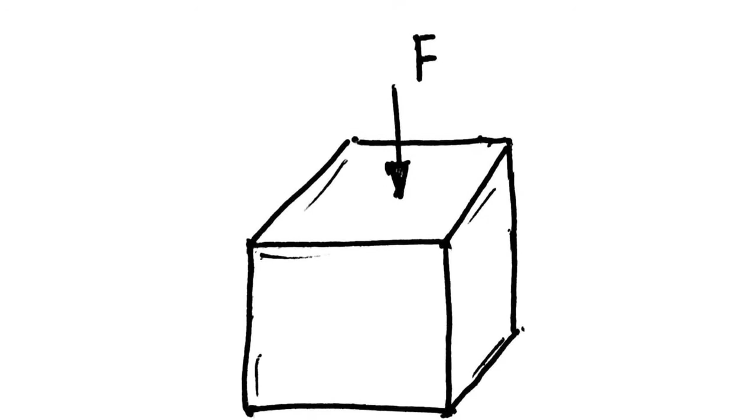Let's observe the picture below and answer the questions yourself.

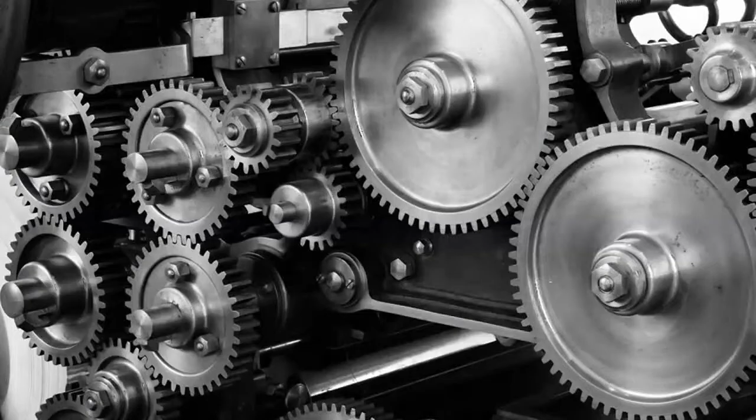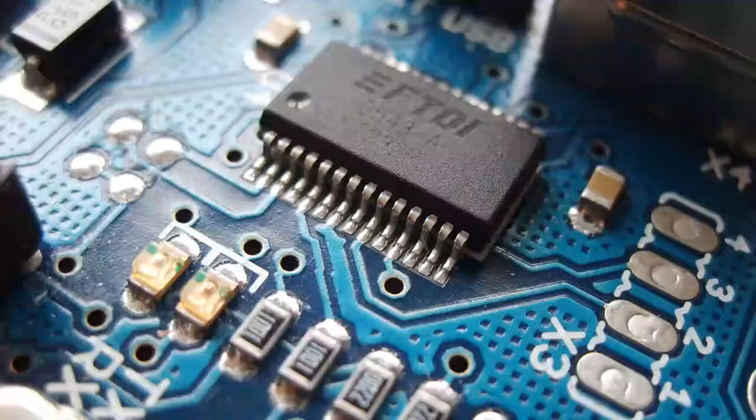In observation, everyday stress simply calls awareness to a situation that needs attention. It reminds us to slow down, steady ourselves, focus, and get ready. We tackle these everyday stressors by studying for exams, practicing a class presentation, or thinking about how to work it out with a friend. We experience stress in daily life.

Stress is a reaction to a changing, demanding environment. Properly considered, stress is really more about our capacity to handle change than it is about whether that change makes us feel good or bad. Change happens all the time, and stress is in large part what we feel when we are reacting to it.

We summarize in observation, stress is everywhere. Although stress is a natural part of life, when it's prolonged or extreme, it can lead to changes in physical and emotional health. Stress becomes a problem when we feel a lack of ability to control what is happening. Stress may trigger physical reactions, upsetting thoughts and emotions, or ineffective behaviors. Stress is a natural occurrence, physically, biologically, and chemically, a universal process.

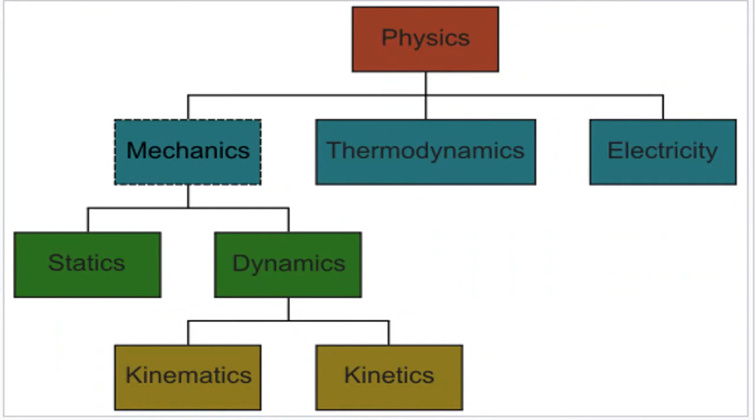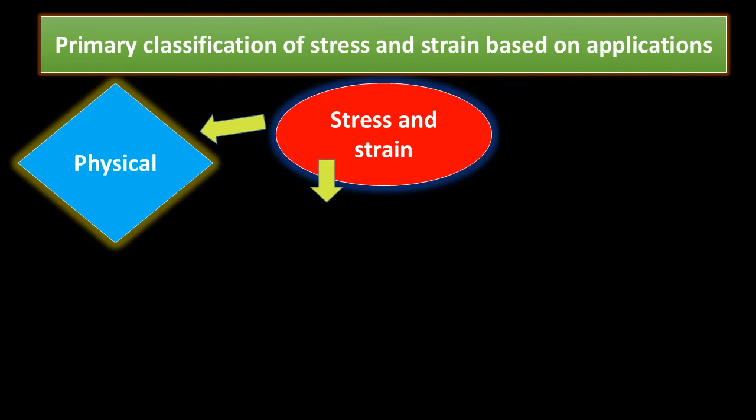Basically, stress and strain can be divided based on applications. The primary classification of stress and strain is physically, chemically, biologically, according to the study of science. It is divided by the classification of stress and strain.

Mechanics is a branch of the physical sciences that is concerned with the state of rest or motion of bodies that are subjected to the action of forces. In general, the subject can be divided into three branches: rigid body mechanics, deformable body mechanics, and fluid mechanics.

Rigid body mechanics is essential for the design and analysis of many types of structural members, mechanical components, or electrical devices encountered in engineering. Rigid body mechanics is divided into two areas: statics and dynamics. Statics deals with the equilibrium of bodies, that is, those that are either at rest or move with a constant velocity, whereas dynamics is concerned with the accelerated motion of bodies.

We can consider statics as a special case of dynamics, in which the acceleration is zero. However, statics deserves separate treatment in engineering education since many objects are designed with the intention that they remain in equilibrium.

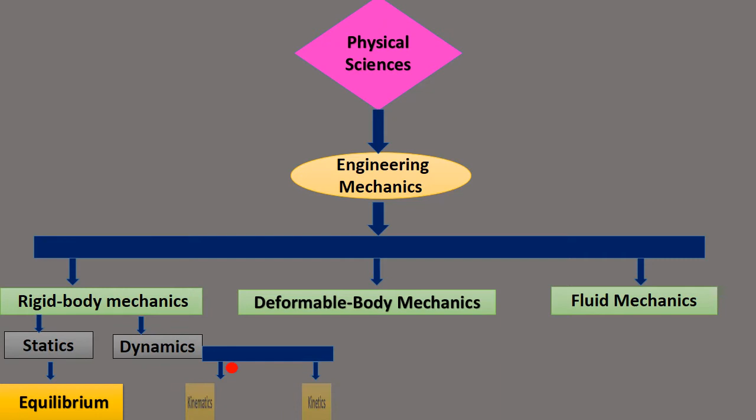The branch of mechanics concerned with the motion of bodies under the action of forces is called dynamics. Dynamics has two branches: one is kinematics, another one is kinetics.

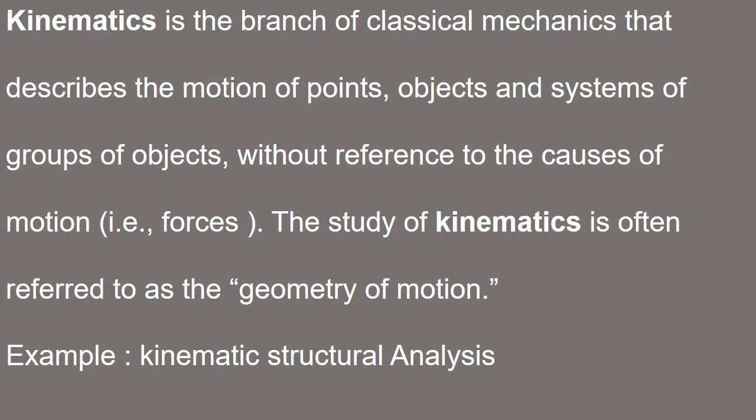Kinematics is the branch of classical mechanics that describes the motion of points, objects, and systems of groups of objects, without reference to the cause of motion. The study of kinematics is often referred to as the geometry of motion. Objects are in motion all around us.

Kinetics is the study of reaction rates and how they are affected. Many factors such as concentration, pressure, temperature, and enzyme activity can impact the rate of a reaction. Kinetics is focused on understanding the cause of different types of motions of an object, such as rotational motion, in which the object experiences force or torque. Kinematics explains terms such as acceleration, velocity, and position of objects.

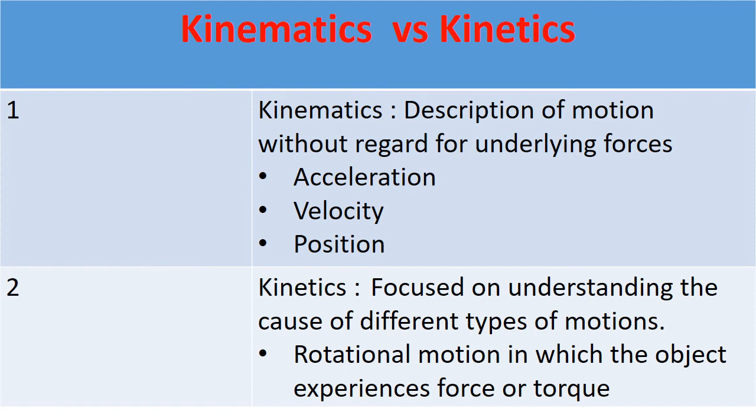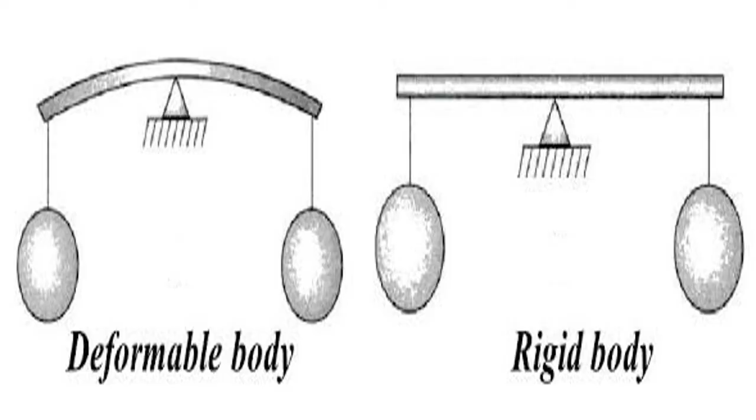The next category of mechanics is deformable body mechanics. In mechanics, any body that changes its shape and/or volume while being acted upon by any kind of external force is considered deformable. Fluid mechanics is the study of fluid behavior at rest and in motion. Examples of fluids are liquids, gases, blood, and plasmas.

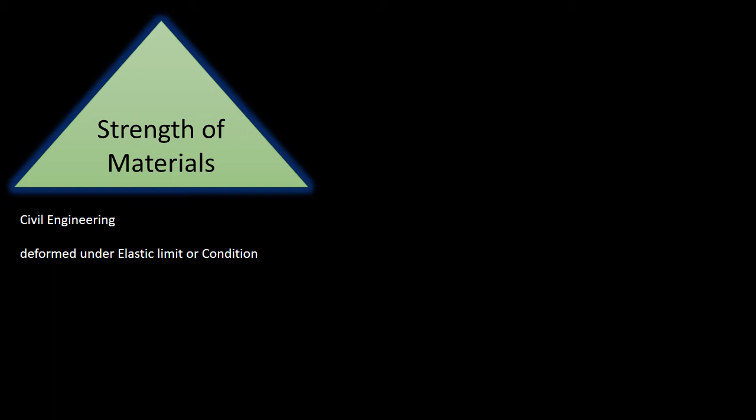Strength of materials is one concept used to study materials. It is part of the concept involving stress and strain in civil engineering. Strength of materials in mechanics: in the mechanics of materials, the strength of a material is its ability to withstand an applied load without failure or plastic deformation. The field of strength of materials deals with forces and deformations that result from their acting on a material.

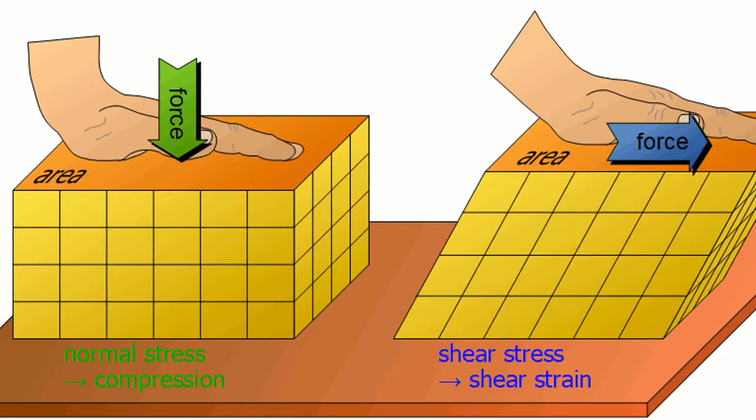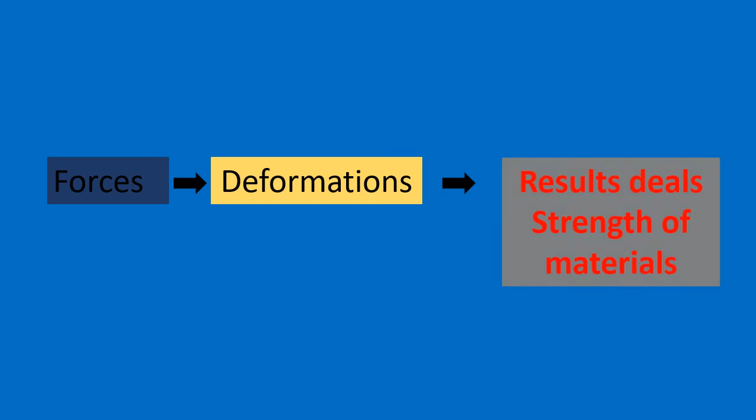Strength of materials is an engineering discipline concerned with the ability of a material to resist mechanical forces when in use. A material's strength in a given application depends on many factors, including its resistance to deformation and cracking, and it often depends on the shape of the member being designed.

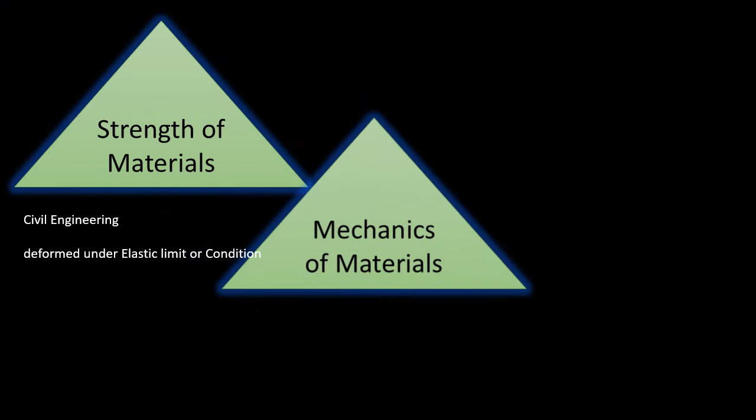What is the difference between strength of materials, mechanics of materials, and solid mechanics? The basic and main difference is that in mechanics, we assume the bodies to be rigid, but in strength of materials, bodies are considered to be deformed under an elastic limit or condition.

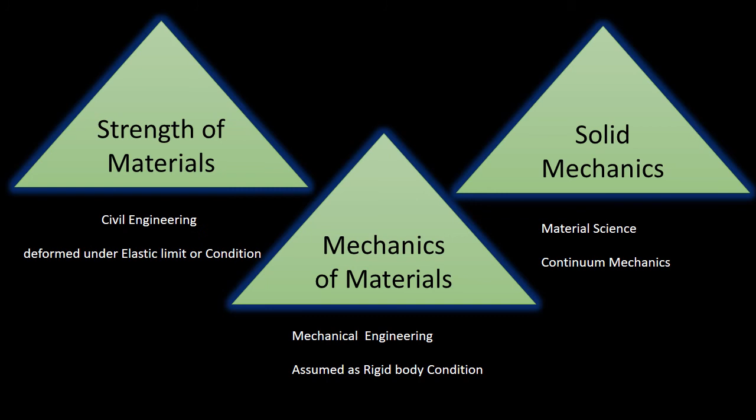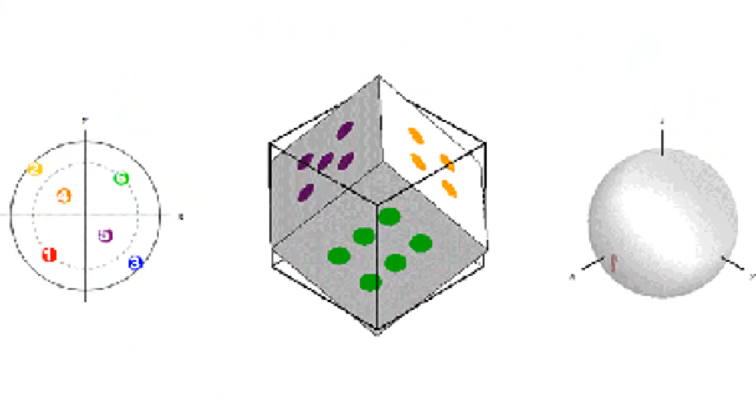Solid mechanics, also known as mechanics of solids, is the branch of continuum mechanics that studies the behavior of solid materials, especially their motion and deformation under the action of forces, temperature changes, phase changes, and other external or internal agents. Solid mechanics is a vast subject because of the wide range of solid materials available, such as steel, wood, concrete, biological materials, textiles, geological materials, and plastics.

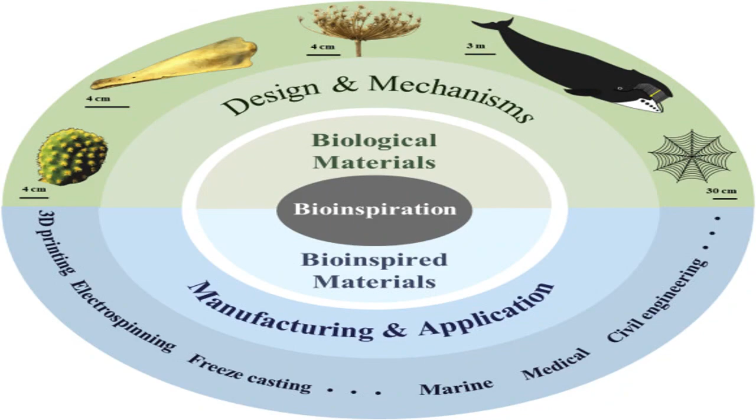Solid mechanics includes both subjects, strength of materials and mechanics of materials. It is purely related to material science in engineering. In the next class, we will discuss the fundamental concepts of stress and strain.